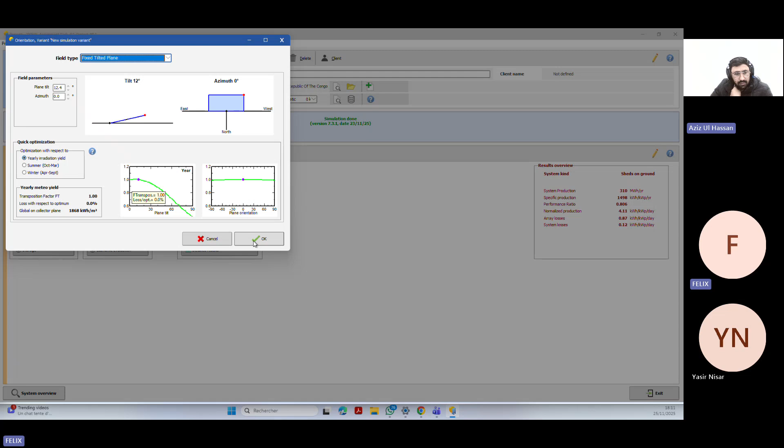Loss is 0, no issue, because our system is such that you said 200 is mandatory AC. I take two inverters, Sungrow, number 2.

That is it. I have the modules in series of 15, and number of strings 23. And for the ohmic/detail loss, I take 29 and mutual shading free.

Here I take 1% as loss. I take that at 70. Mutual shading I take as 0.6, like what we do.

I take 2 here, IAM loss is there. Auxiliary I take to be considered, but I don't put any kilowatts. I don't know if it's mandatory here also, as per the requirement of the project. For small scale projects, it is not required. So you should uncheck that.

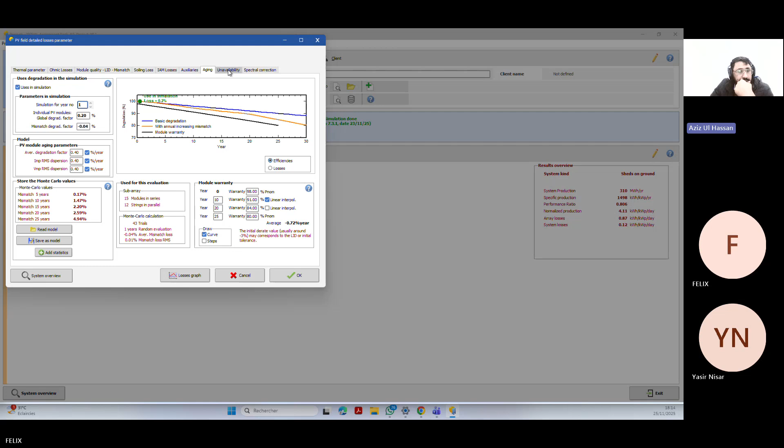Availability, I consider 2 days for maintenance. The plant must be off for 2 days per year, and for here, I don't consider it. I go near to the shadings.

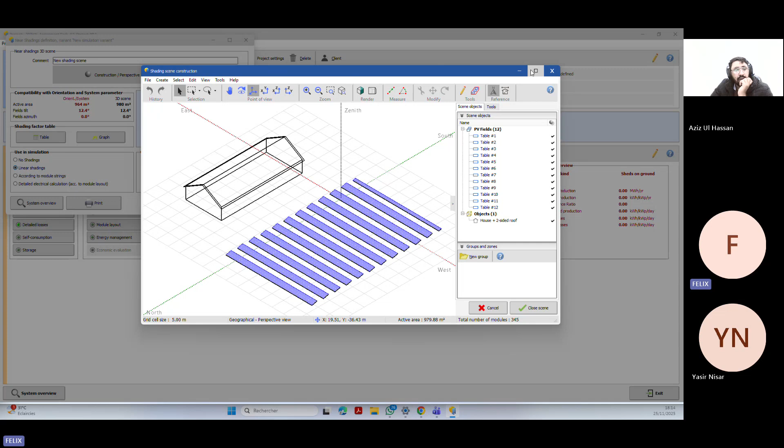I do perspective there, that is what I used, 15 per sheet, but here is 15 only to be there. And I also do a module layout, and I use it for the simulation when I calculate.

I have some loss, electrical loss, I see 0.2 for electrical loss. I say that is not a big issue.

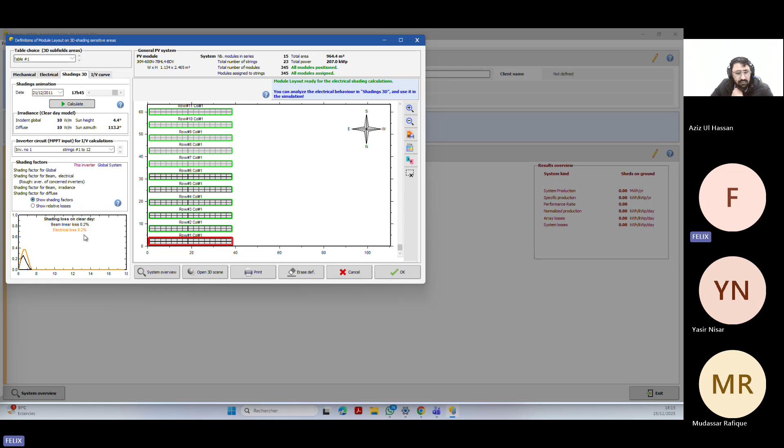Okay, you can add this one, but if you don't want to add it, you can skip that option. It is not a mandatory requirement.

And I ran the simulation. Okay, that's great. The report is there. Yes, okay, that's great. You have done the simulation. That's great.

Now, the option is available to save the document as a PDF, the one above. You can see that, no, this one. Yes, save this one. Click on that, yes, already saved. Let's put okay.

Okay, now you should send this file to me. And if you want to save the project file, you should save as or export as, and it will ask for the location.

That is the issue you are facing, the saving of the file. Yes, saving the file. Let's close that project. Save this project now. Is this project already saved?

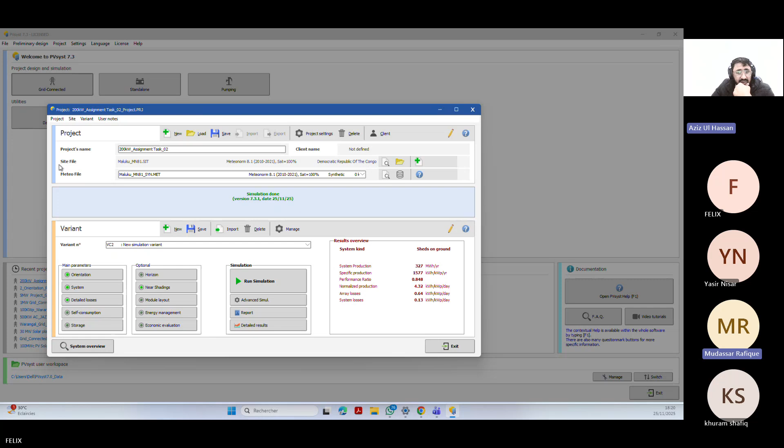For example, when I... I don't know that file. Yes, yes, this one, this one. It means if I send it to you, you can open that.

Yes, I can open it, and also you should send me these PDF files. Okay, because I need to take it in. It means it's okay now, because I was afraid if I send it, it might not be the file you're looking for. Yes, yes, this one is fine. Okay, thank you, I think I'm okay for that part.

Okay, Mudassar and Khuram, do you have any issue in the PV system? Sir, I was unable to install PVsyst the last day because of some issues in my laptop. I will try today, maybe tonight, and inshallah I will submit it tomorrow.

Okay, no issue, but if you have some issue... yesterday in the Friday lectures, most of the part I have already covered, like the best systems, the orientation, the 3D shading analysis, and I arranged that class because it is the last class of the PV system. I just want that if you have any issue in that class or in the previous classes, you can raise the concern, then I will explain all these concerns in that class.

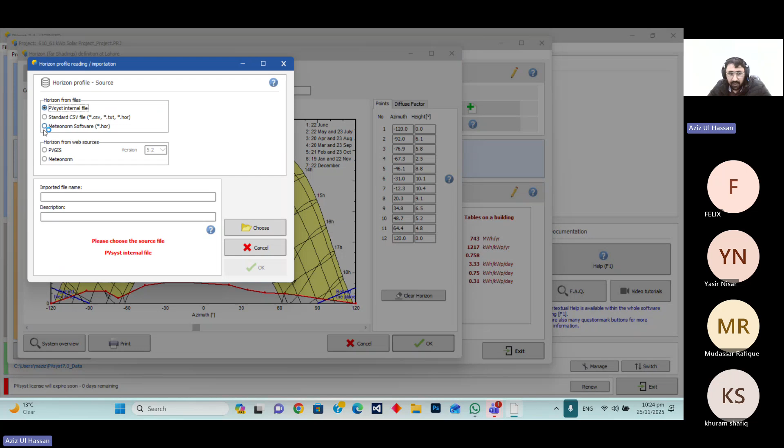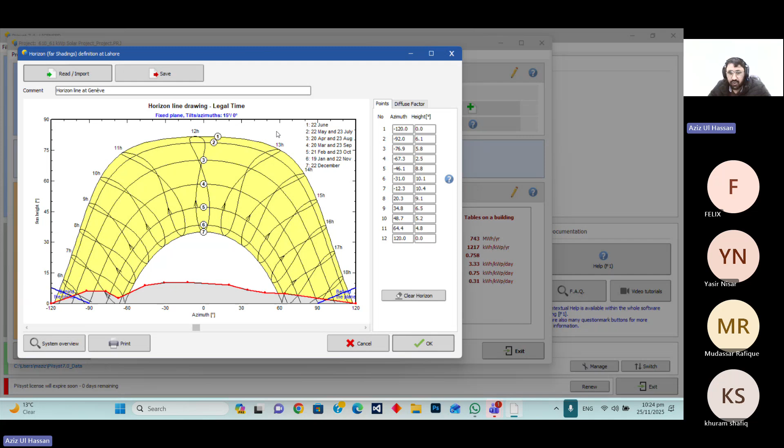If you want to add the horizon losses, you can add them from that file, like the standard horizon file, if you want to import like this one. It is not a mandatory requirement, but some clients have asked us to add these losses. I have already explained the horizon portion, like which they are showing in the PVsyst report.

Sir, can we select the simulation every 5 years or 10 years? Is it suitable?

Yes, it is suitable, but there is some issue with the meteonorm files. We can't select that for 5 years. We can do other options like this one, but meteonorm files are not allowing this for 5 years. Like if you could do that, you can, but they are not allowing these options for 5 years.

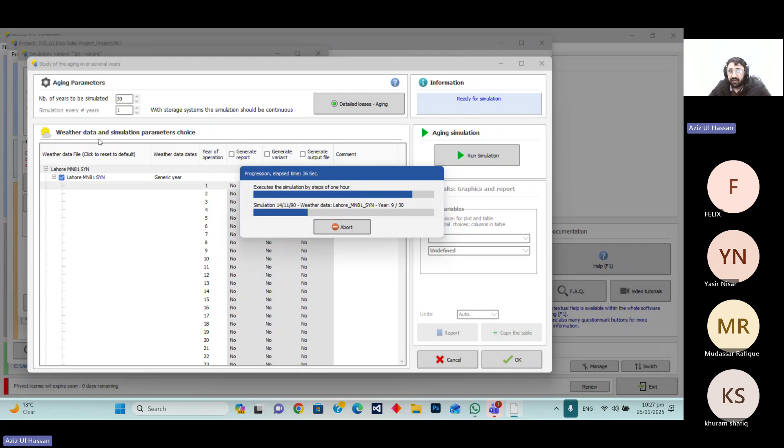Basically, the other option you can see is that with the storage system, the simulation should be continuous. You can see that we have already added the battery storage system in that. That is why maybe they are not allowing us to turn on that option.

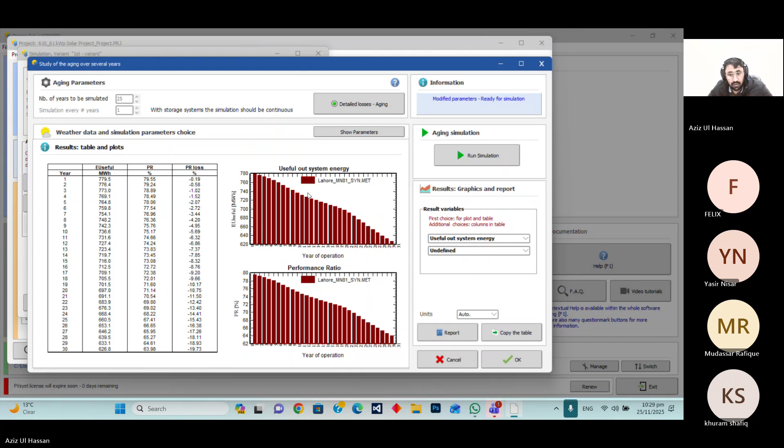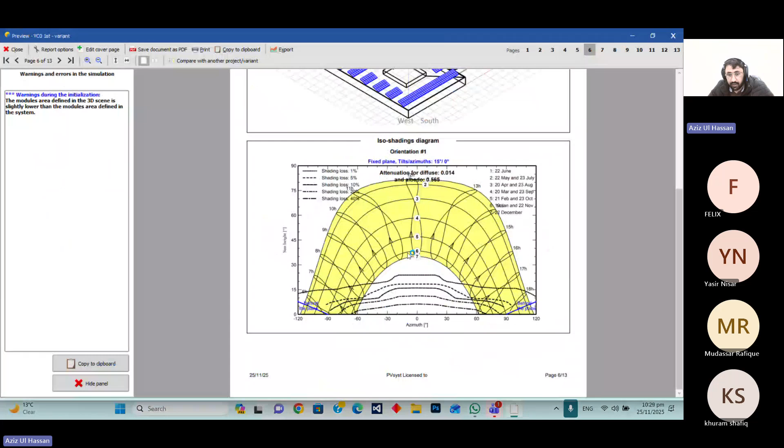You have just added the 3D shading analysis, and this horizon I have already explained that point. And this is basically the year-by-year PR and the energy number for the 30 years. We have added that in the aging tools option.

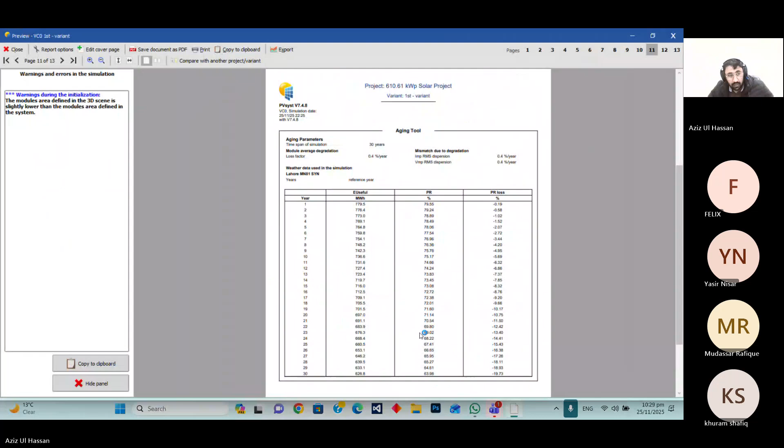And as per Mr. Yasir's issue, we will just recall this. This is basically...

Yasir sir, there are two options for the battery systems. One is the self-consumption option, because when we go to the battery systems, we have to select among three options: self-consumption, peak shaving, and weak grid/islanding. Basically, the battery system is not the hybrid system we are talking about; it is basically a separate system.

Like Mr. Yasir, you have seen in our large scale project that when we add the battery systems through the PCS options and MV station, it's separate, not through the same inverter like the Huawei inverters and the battery hybrid inverters. So the purpose of these battery systems, one is for self-consumption, like on the grid they have some self-consumption options like the auxiliary, TSF, temporary site facility issues, or other things connected with the grid directly, and they have self-consumption, and we use the battery system for those options.

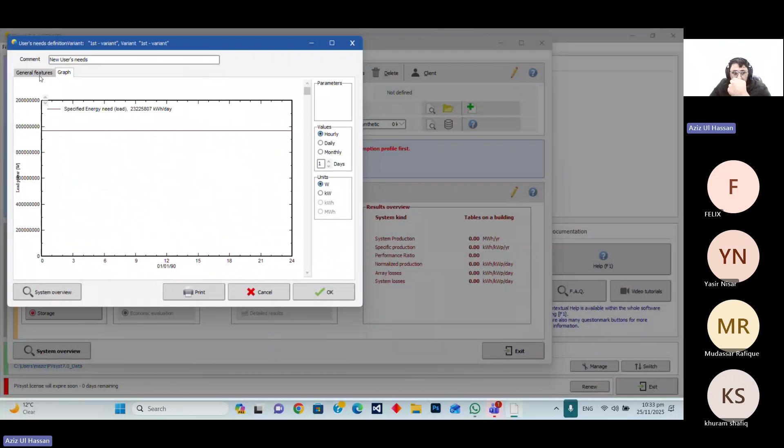And the household consumption graph, you add daily or monthly household energy requirements, and the data from the CSV file. You can upload any files. So we put this self-consumption as 20 kilowatt hours per year, or select this 20 kilowatt load and just press OK.

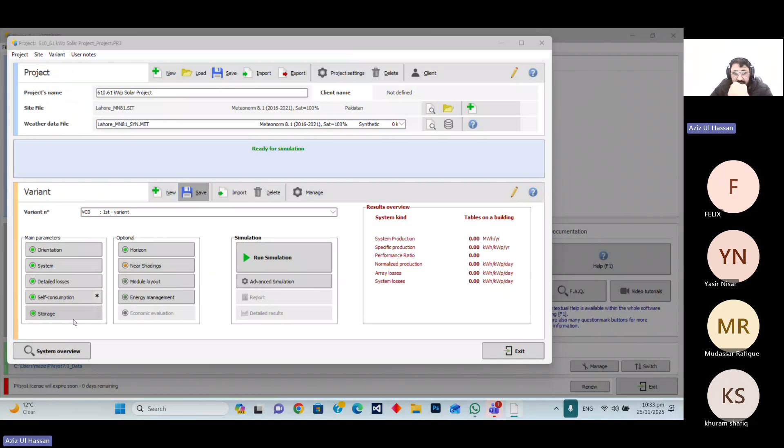And for this battery, we have selected self-consumption. It will take the power, the self-consumption, from the file.

Here is the option for the battery system selection, like lithium, lead acid, all technical details, voltage, capacity, manufacturer, whichever you want to select.

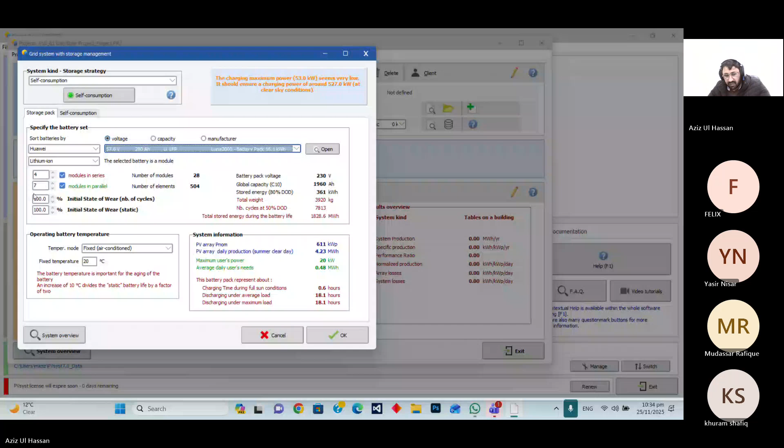So here we have selected the Luna battery, 16.1 kilowatt hours, 57.6 volts in this one battery. And we have selected 4 in series and 7 in parallel options. Just click on that option, and they will automatically add in your system.

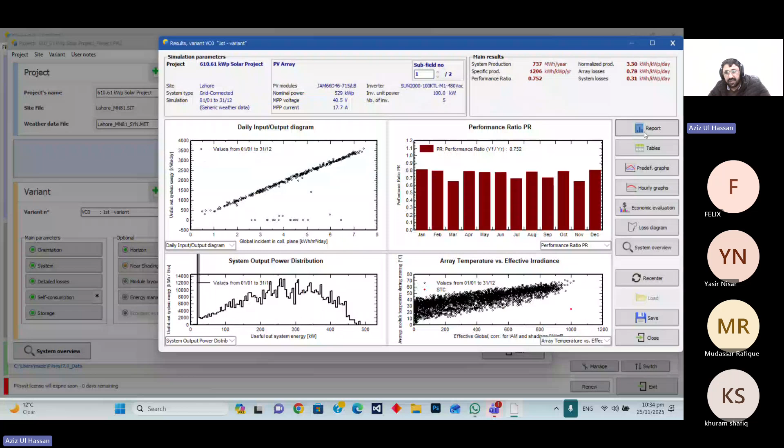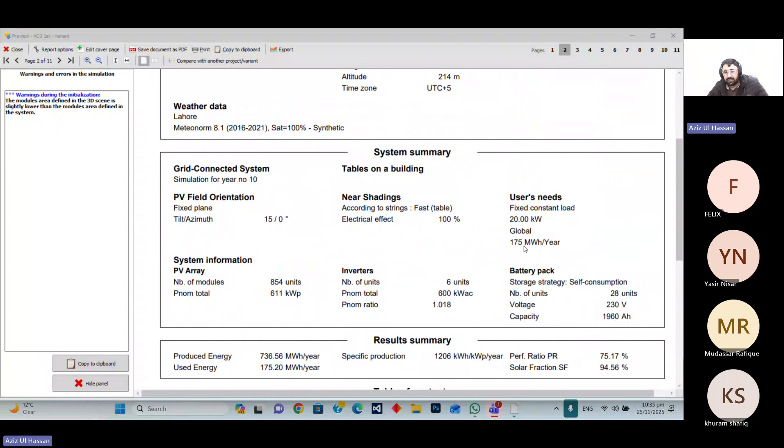Now when we simulate our simulation, you can see here battery pack self consumption, number of units 28, voltage 230, capacity 1960 ampere hours. Fixed constant load 20 kilowatt global, 175 megawatt hours per year is the self consumption. Here you can see these options.

Any other concerns, guys? When we talk ahead about the large scale BESS projects, that is for peak shaving or weak grid, not like over hybrid system. No, it's just for the grid stabilization.

Like in the South Africa region, we mostly see projects with BESS systems, and also in Saudi Arabia we are seeing BESS systems installed. Most of the time they have self consumption options with that. Like in remote areas where no grid is available, the BESS will be installed with the help of solar. So for peak shaving, I think that BESS is working like the off-grid solar system.

Maybe remote areas will be off-grid systems. In large scale projects, they will not use the same inverters, I think they use a separate one for large scale projects, as per my understanding. Maybe some inverters available in the market are for large scale, because I have seen the small level inverters for off-grid systems.

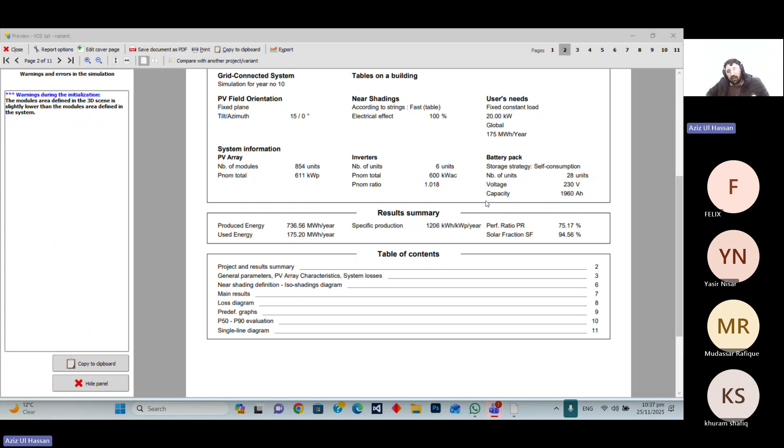But mostly, like the BESS systems we have seen in South Africa, many have no solar system, just BESS installed with the substation. I think that one is just for peak shaving or grid stabilization options.

Any other concern, guys? Yes, the concern is regarding SketchUp with Skelion.

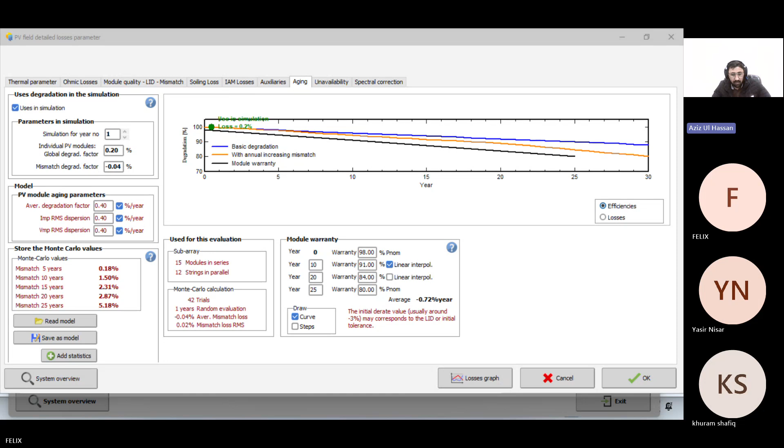That is my issue because I already did something. Have you checked in the 2025 version? Yes, I checked. I only installed... let's see, I don't know if you can see my screen. Yes, I can see, but that's PVsyst, not SketchUp. Yes, SketchUp is opening. I already installed it, but it can only install 10 modules. Yes brother, I have already explained that.

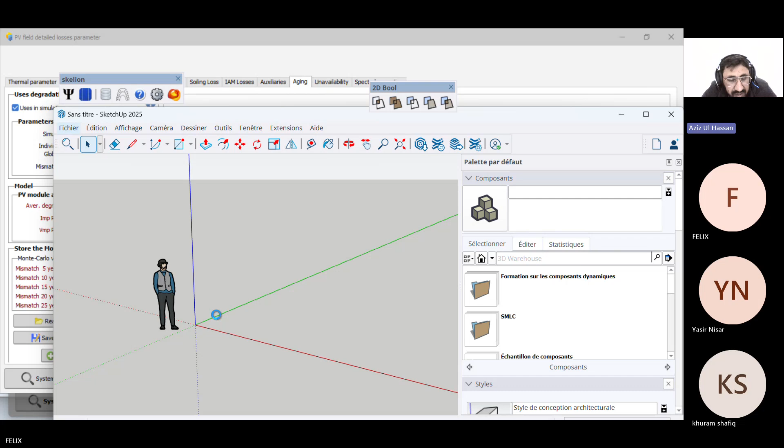Basically, this SketchUp Skelion is available for just 10 PV modules because they have given the limitation from the software. They are not providing the free version with the maximum PV modules. Now what will you do? You just make the 10 PV modules from Skelion, and then you copy it yourself.

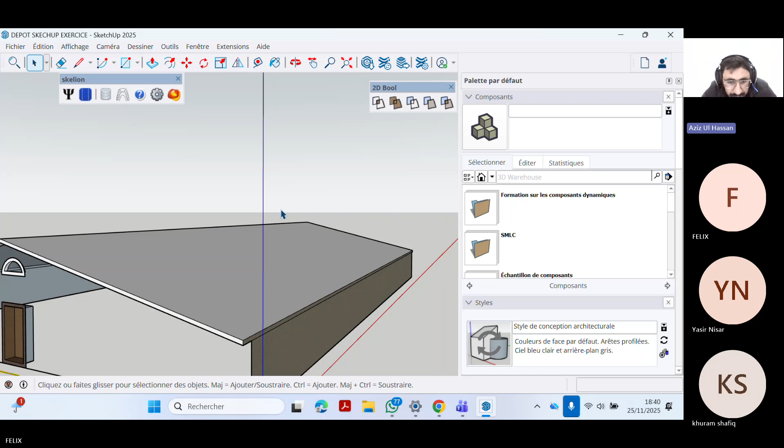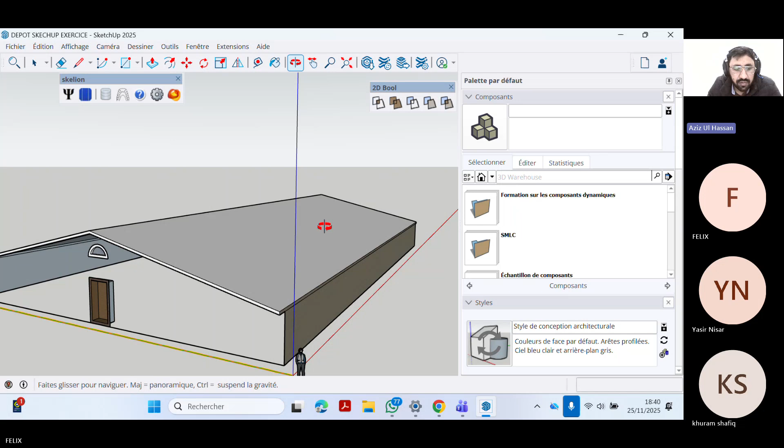Okay, it means I will put 10 modules here and copy for the number. Yes, yes, yes. Okay, that was basically the free variant restriction now. They are not providing the full free version options at this time.

Okay, thank you. Yes Khurram, I think you should check with 2025. If they are not allowing it in 2023, you will check in 2025. Maybe it will work because in the Flex version 2025, they are working. So you should check these options also.

Also please explain 2D shading analysis. 2D shading analysis... Simulation parameter, which one? Which parameter are you talking about?

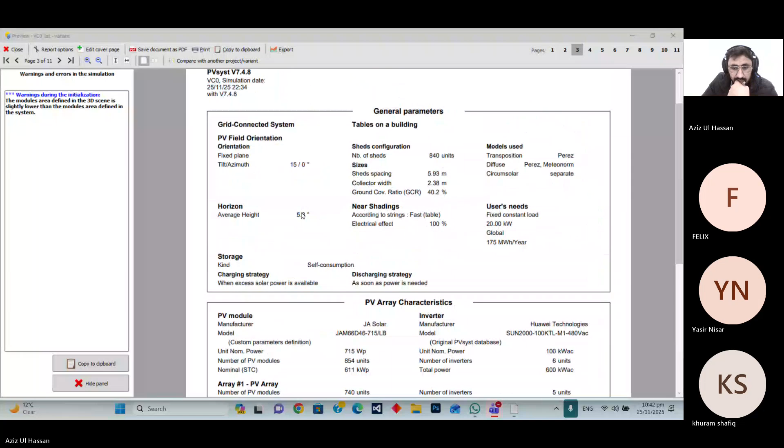The other one, which portion are you lacking? You can write it down, then I will see what parameter you are talking about. Mostly I have covered already, like the height, the other things.

Okay, bifacial. Any other parameter? Khurram, you can send me the message in the group or in the personal chat. I will explain every factor you are lagging in, I will tell you through voice.